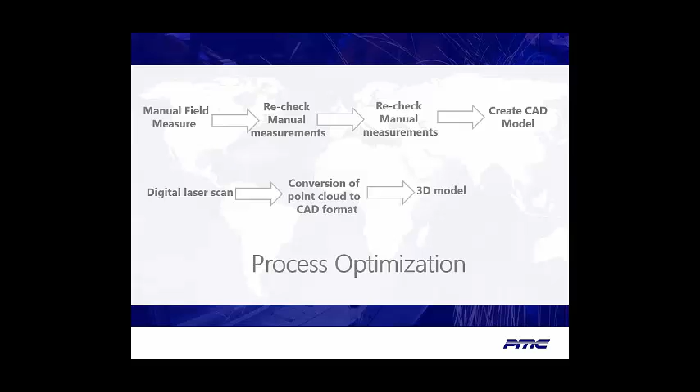This is a typical workflow for terrestrial scanning. There are various options based on specific desired outcomes. Probably the most important step is to create a detailed map of specific locations within a facility to scan. This ensures that the field team will capture the right amount of detail required for the projects. For example, are there drop ceilings? Is there adequate light for a color scan? Or do you need all aspects of the MEP systems? Then the field team will scan, bring scans back to the office to register and process, then hand off to the design team.

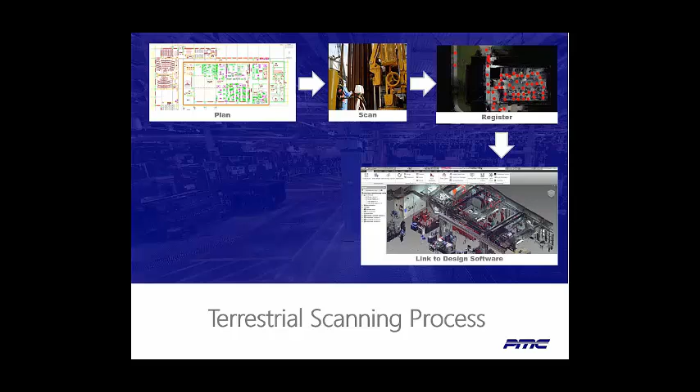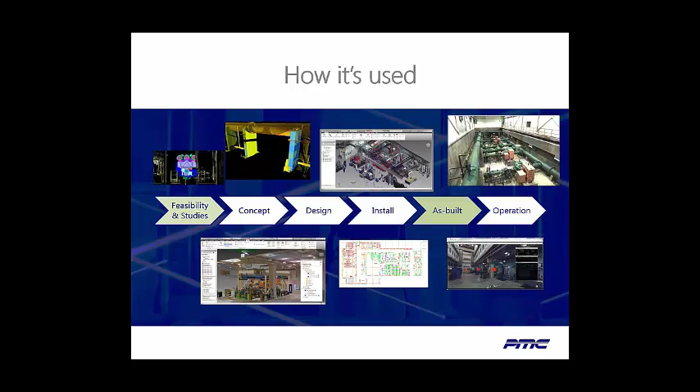Today, terrestrial scanning is used in all phases of project development. The advancement in laser scanning equipment and supporting software has made scanning cost-effective in all aspects of an AEC project. While the traditional points of use are still in the schematic and completed project phases, we will be examining its value throughout the design and construction phases. Using specialized equipment, we can scan inaccessible areas such as small tunnels, roofs, and shafts. Higher accuracy equipment can be used for reverse engineering for high-detailed architectural elements.

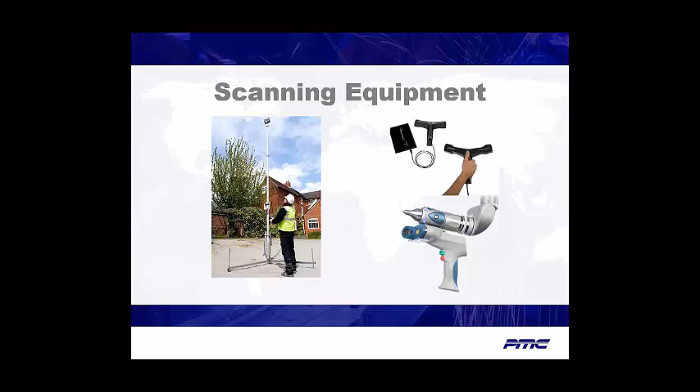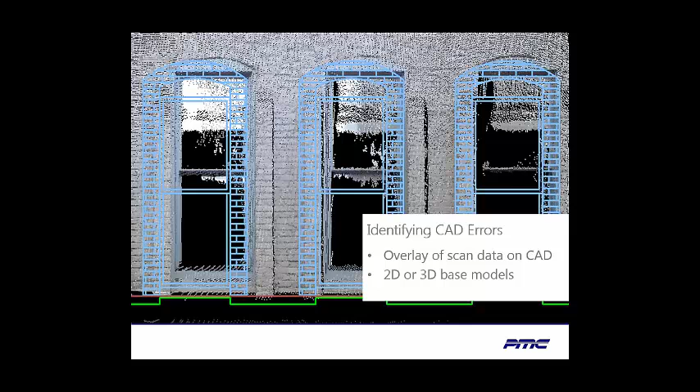Our first case study focuses on a project we completed on a building that was over 100 years old. There were no existing as-built models available, and field measurements weren't accurate. Errors found during the course of demolition prompted the general contractor, SACSI, to call in PMC. We completed a deviation report of plans versus actual. This is the point cloud data from our exterior scans. It was possible to overlay the scan data directly on the CAD layout to visualize the variances and where corrections needed to be made. This saved countless hours of corrections to be made on the construction site and cost overruns.

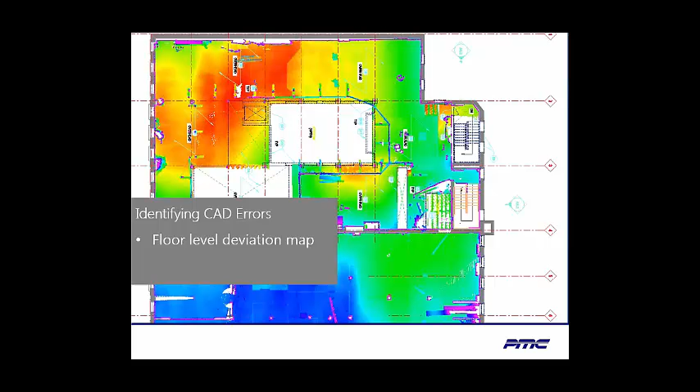The color chart gives a graphical display of the dramatic floor level deviation. The red indicates plus 5 inches and the blue indicates minus 5 inches. The original remediation plan was to pour concrete to level the floor, but the 10 inches in variance called for alternative plans. This saved countless hours of corrections to be made on the construction site and cost overruns. PMC's expertise in architecture allows us to work with the scan data in many formats, giving the optimal views required for a specific project.

Architecture is dependent on photos of existing elements, but also requires relationships between elements. Photos can show existing conditions, but cannot determine exact relationships between elements. During the scanning process, the digital scan is taken, and in the same position, an associated photo is taken to provide the ability to compare and contrast.

This is another case study showing the benefits of using laser scanning. This project was a 10-story abandoned building. Scanning was the only way to document accurate exterior dimensions.

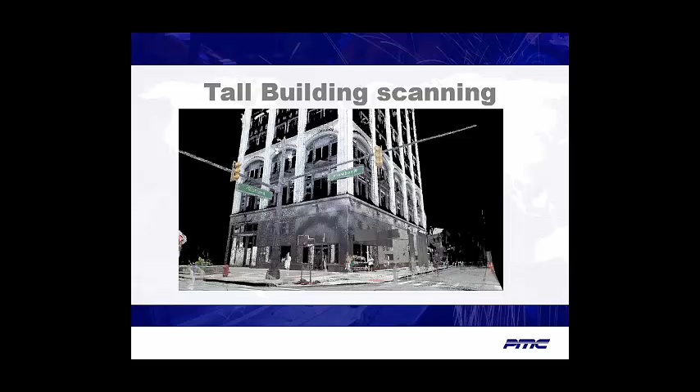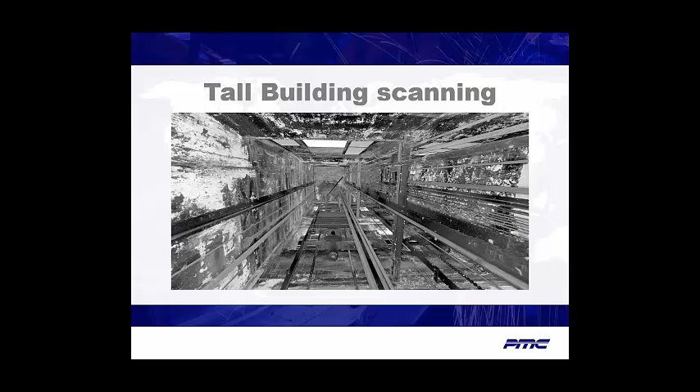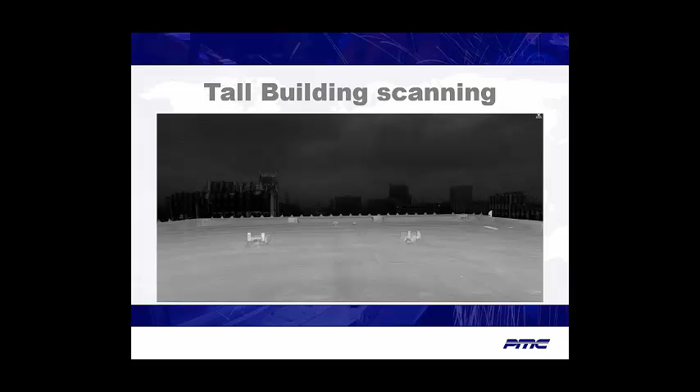As the building had been abandoned, the condition of the roof was unknown, and safety precluded manual field measurements. The scanning could be safely done from a lower roof using boom equipment. While there are many advantages to having just an accurate as-built of a facility, let's explore the many more uses for laser scanning in architecture.

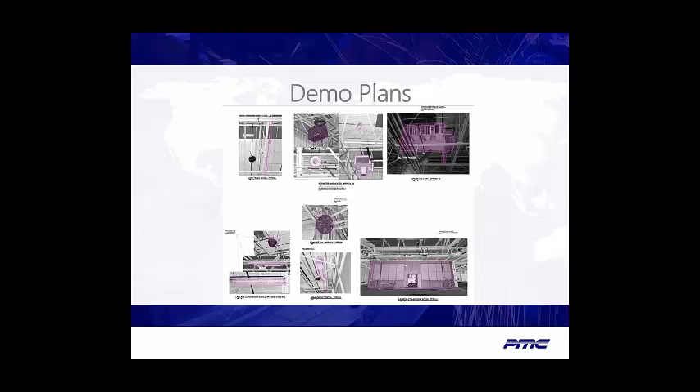Architects can quickly create demo plans by drawing directly on top of the point cloud, making accurate demo plans with exact dimensions. This frees up time to move directly into new drawings or models. During schematic design, models for true as-built conditions can be created in far less time than design for manual measurements. To visualize proposed changes, new elements can be added to the model to evaluate multiple scenarios. The mezzanine shown in this model helped visualize the proposed changes and verified spacing.

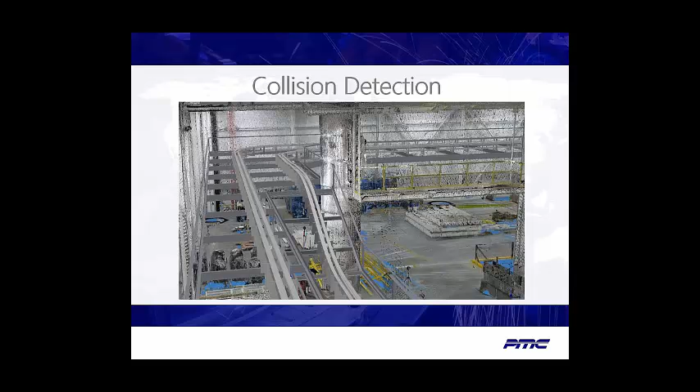Laser scanning has been used in industrial projects for years. The complexity and density of plants makes it difficult to verify clearances without an accurate as-built model. A mistake of just a few inches will necessitate major rework and field changes. The rapid evolution of laser scanning has reduced the time and cost of producing a point cloud of a facility.

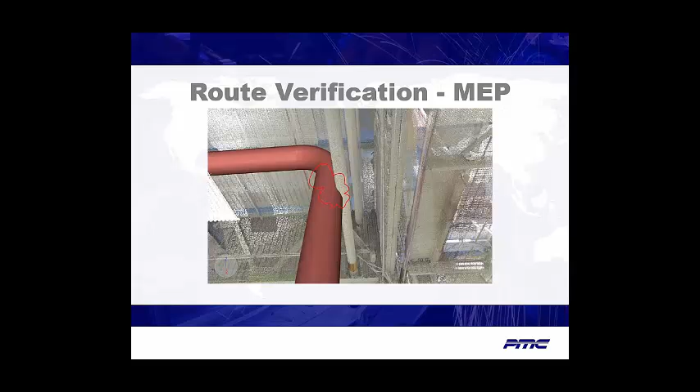PMC can add value to construction reviews by overlaying the model directly on the point cloud, checking accuracy of installations. With the proper planning and scheduling, PMC can accomplish this on the day of the review. Many potential errors aren't readily seen in a 2D perspective. For this project, PMC converted the proposed 2D drawings of a new piping system into 3D and overlaid on the point cloud. This allowed detailed review of plans versus reality, all in a very short turnaround.

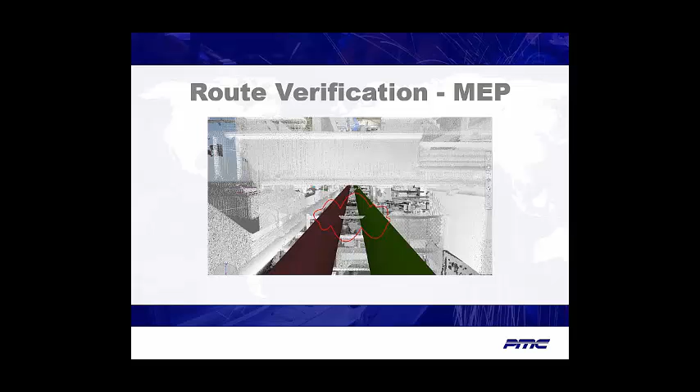At another point, the 2D drawing didn't accurately show the height of a fencing, which would have been a very costly field change if the collision had not been detected by the use of laser scanning. Using this method of evaluating the piping route, many small interferences with existing light fixtures were also visible.

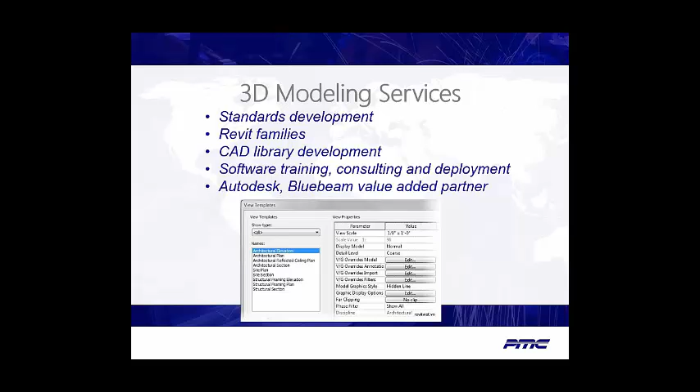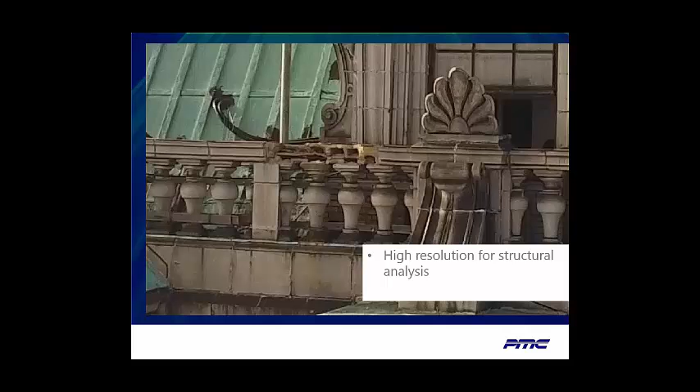While there are tools available, such as Google Earth, they won't be accurate in a detailed view of a specific structure. This is the resolution from the drone video. The objective of this project was to provide data that a structural engineer could use to pinpoint specific areas that needed to be physically inspected. With the help of PMC, the engineer could greatly reduce the number of physical platform drops that would have been required.